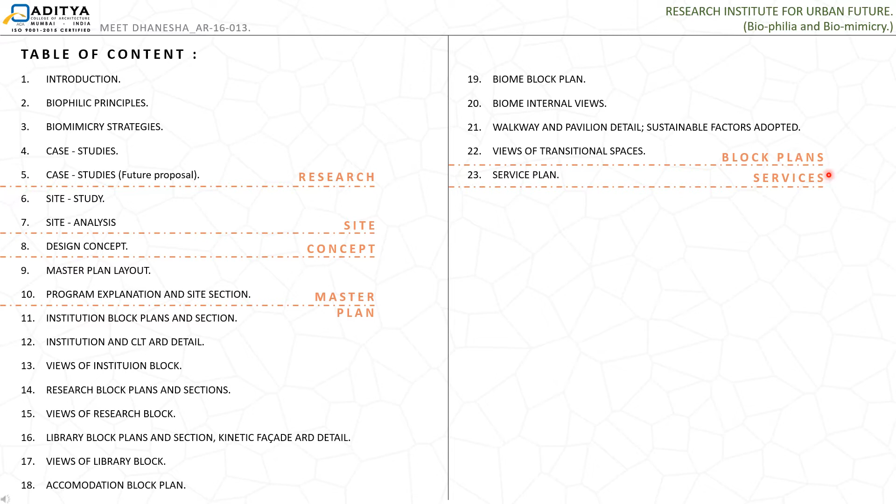To create, conserve, and revive the lost natural ecosystem, biophilia and biomimicry could be one of the approaches for future sustainable cities. There are many effects of urbanization, but ultimately it narrows down to climate change and human health.

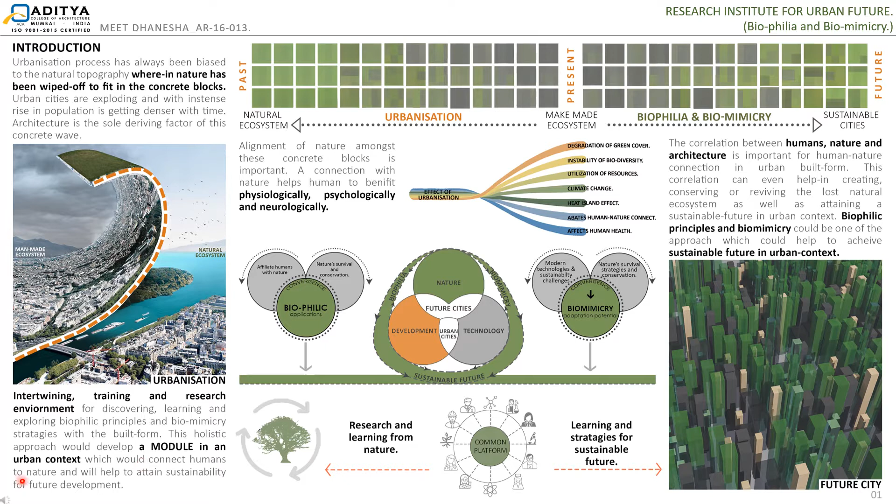This would even act as a module of nature and architecture in urban context. Biophilic principles: biophilia refers to human affinity to affiliate with natural systems and processes.

There are in total 14 design principles which are supported with diagrams and one example for each. These 14 design principles are then categorized into three groups: nature in space, where humans connect to elements of nature directly or indirectly, and natural analogues, materiality and strategies adopted by nature.

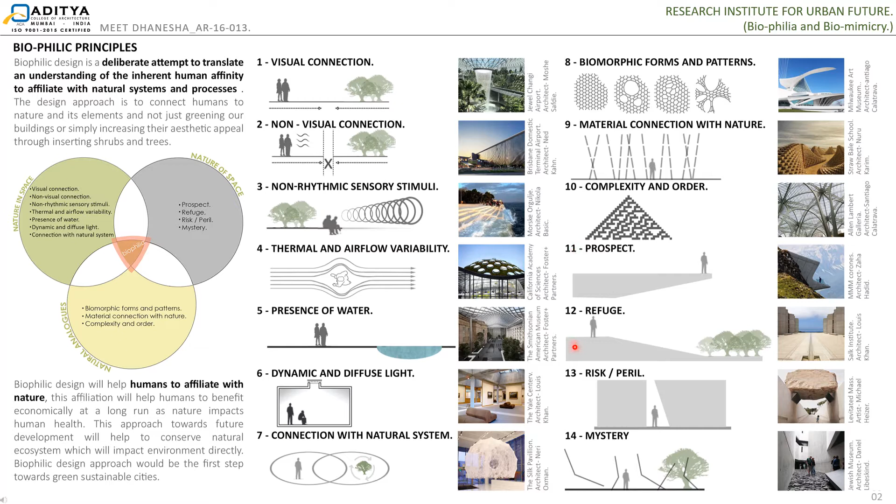Nature of space is about the spatial characteristics. Biomimicry is understanding of process and ecosystem found in nature for its practical applications. It is majorly divided into two levels, ecosystem and organism.

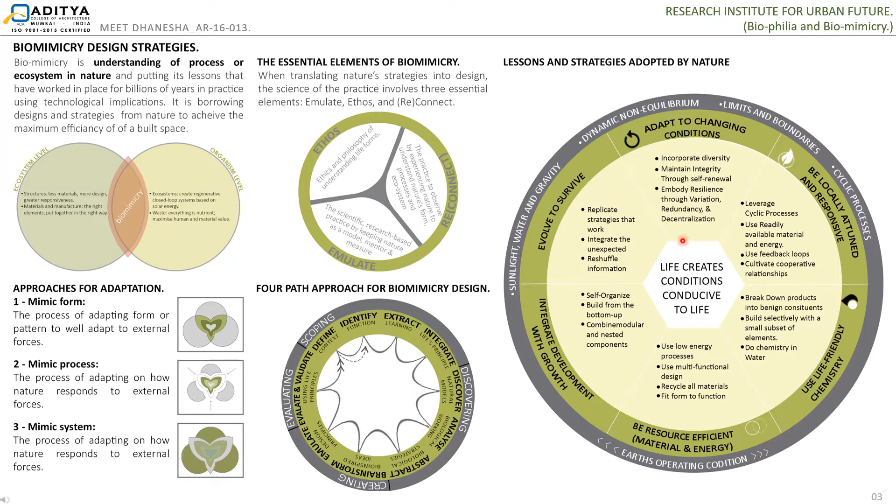Adaptation from nature can happen in three ways: form, process and system. It has three essential elements: ethos, understanding life form; emulate, considering nature as model; and reconnect. The four-path approach needs to be adopted to attain biomimicry. This diagram shows lessons and strategies adapted by nature.

Case studies which had referred to nature as a module and considered nature into the space for human health and well-being were chosen to understand the applications of biomimicry and biophilia with architecture. The contextual impact of the same was also analyzed. The table below shows the biophilic principles and biomimicry adaptations for individual structures.

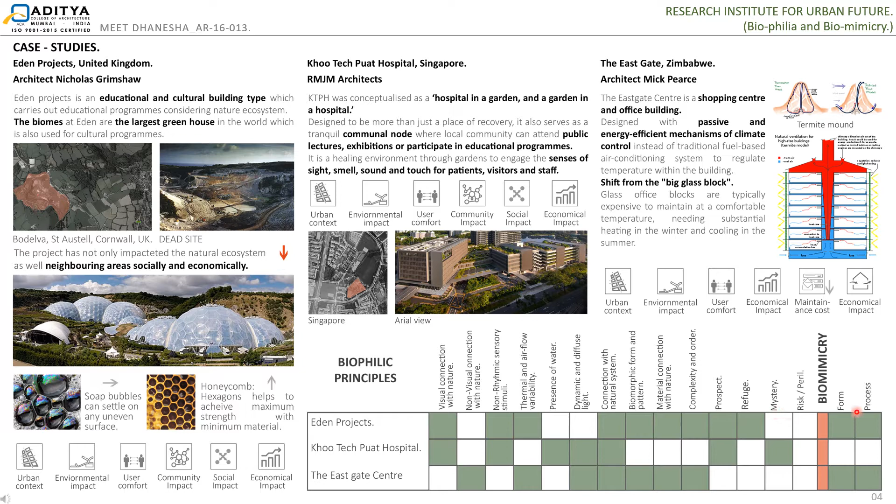Future proposals where initiatives are taken by architects in various countries towards climate change and providing educational research programs, along with public involvement for sustainable future developments. Climate Solution Center in New York, and Oman Botanic Garden in Muscat are the educational research programs for future sustainable development.

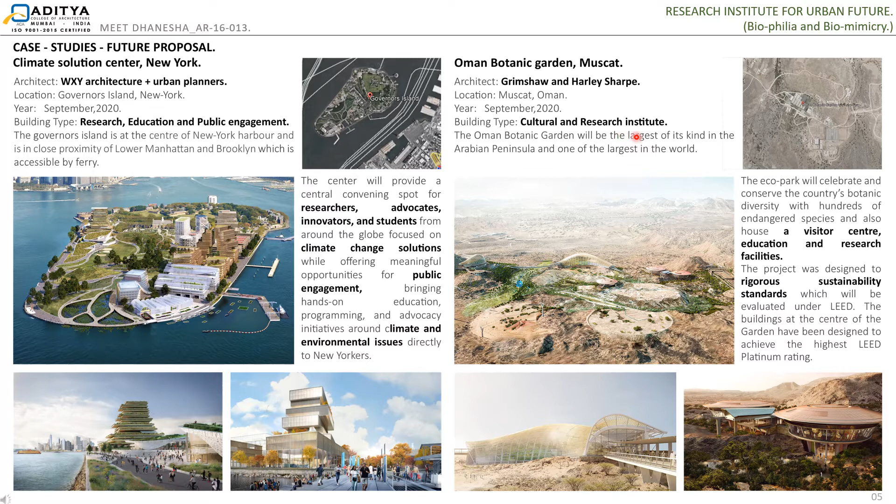The site was taken in Pune, which is the educational hub and in close proximity to the IT hub Mumbai. Pune has multiple research institutes including the Indian Institute of Science Education and Research, which is 1.3 kilometers away from the chosen site. Pune Municipal Corporation has also approved the Smart City Mission proposal.

The site is next to the Biodiversity Park of the Smart City Mission. The map shows physical mapping of the site and surrounding areas. The diagram shows physical character of Pashan district.

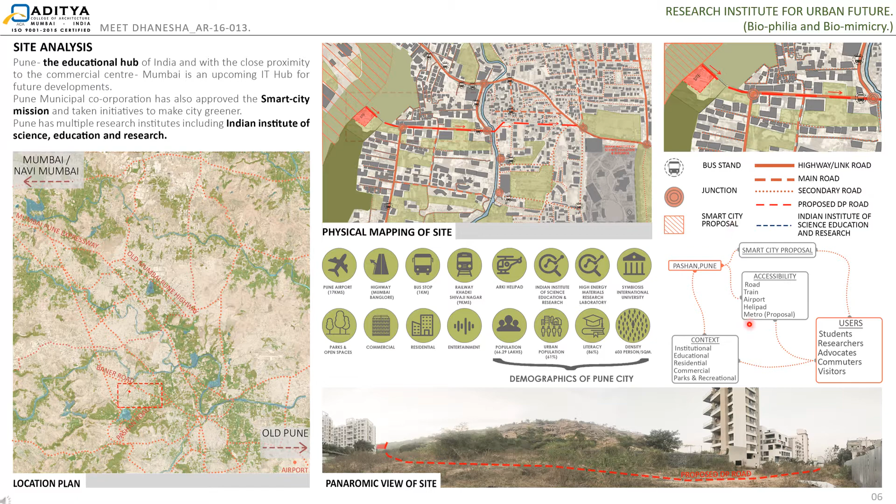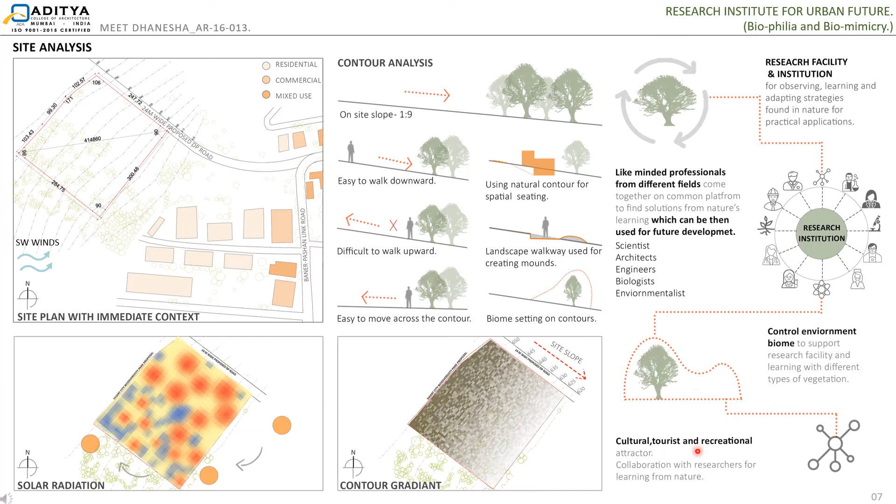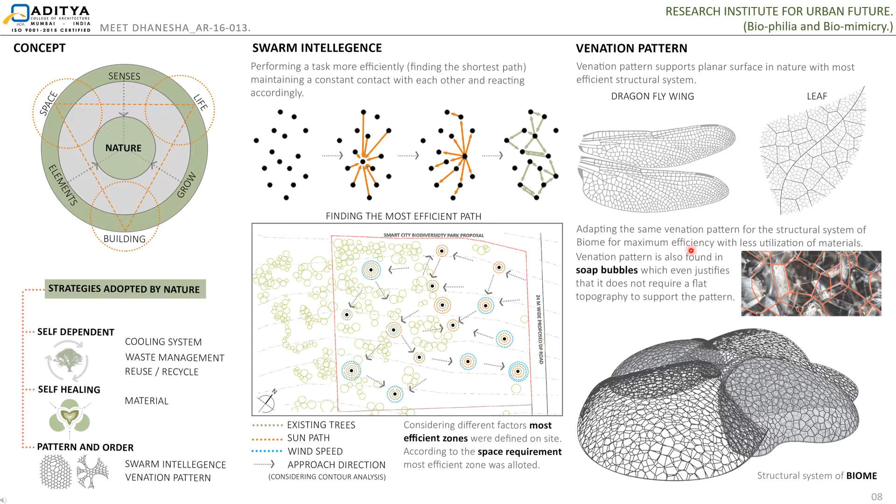Venation pattern, which is found in almost all the structural patterns of planar surface to withstand load, was adapted for the structural system of the biome.

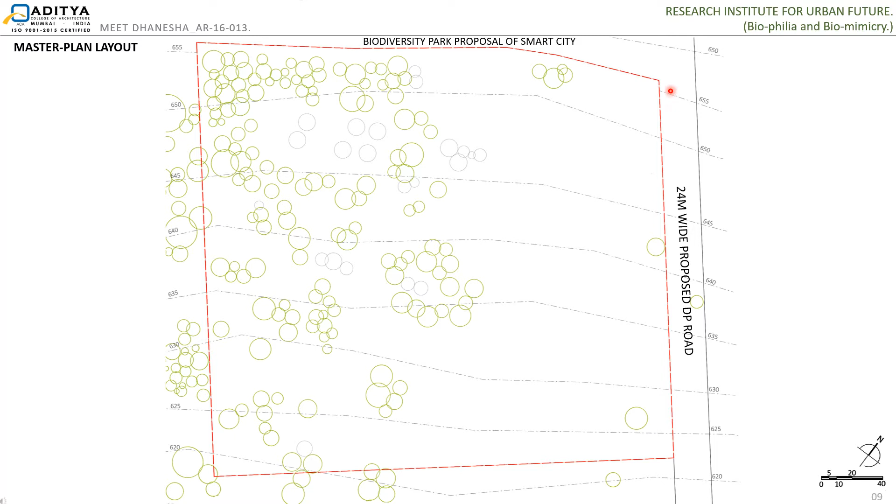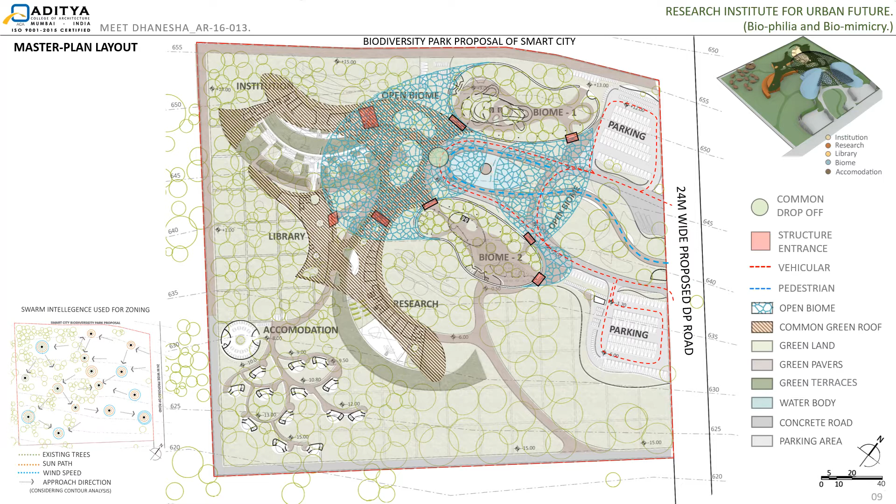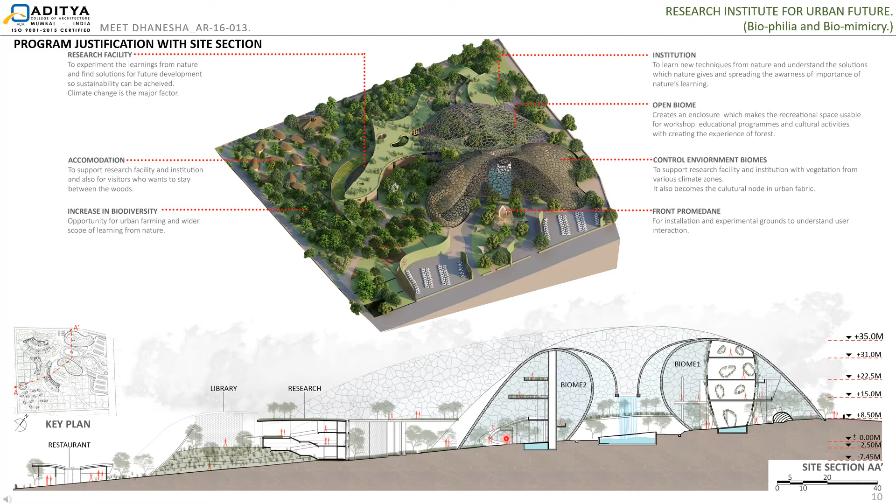Accommodation to support research facility and institution, also for visitors who want to stay between the woods. Front promenade acts as an installation space for the experiments carried out after learning from nature. Site section showing the overall massing of the site and the central waterfall in the open biome.

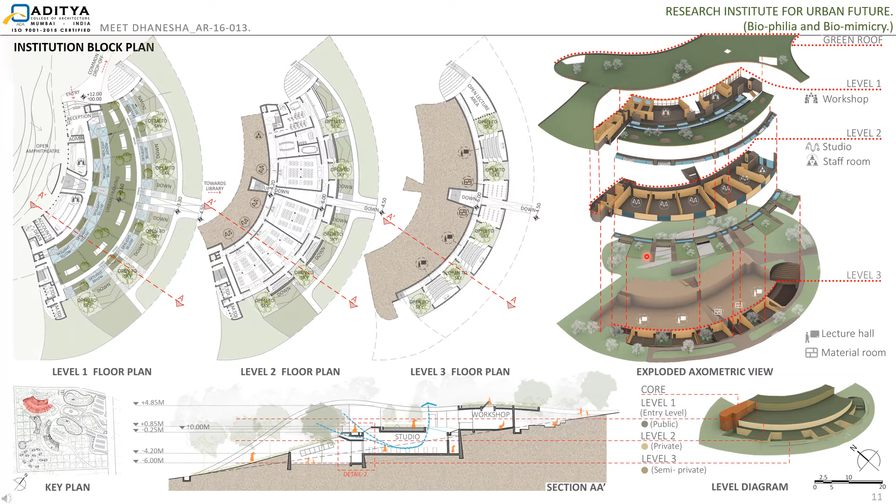Institution section and CLT details. This section shows the utilization of natural topography to fit in the space.

CLT, cross-laminated timber, is the primary material used along with steel for connections and RCC for retaining the soil. CLT has a lower carbon footprint compared to steel and concrete, and gives a wooden finish inside the space.

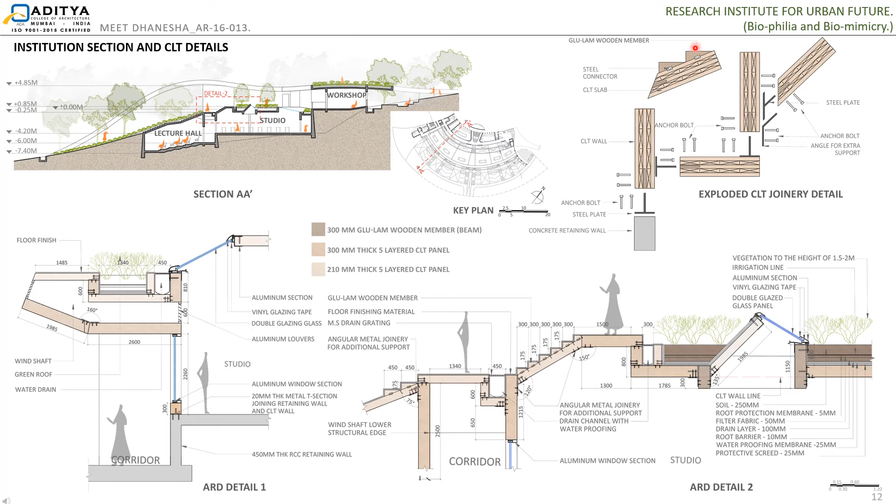The detail section shows joinery details, structural member sizes, and different layers of the green roof. This diagram shows how CLT members are joined using steel joinery and by overlapping the members. This is a detailed section of the wind channels created for ventilation with louvers.

Views of the institution block: exterior view of the upper level showing the green roof of individual spaces with skylight and louvers, open amphitheaters for public programs, and internal view of the studios with skylight and louvers.

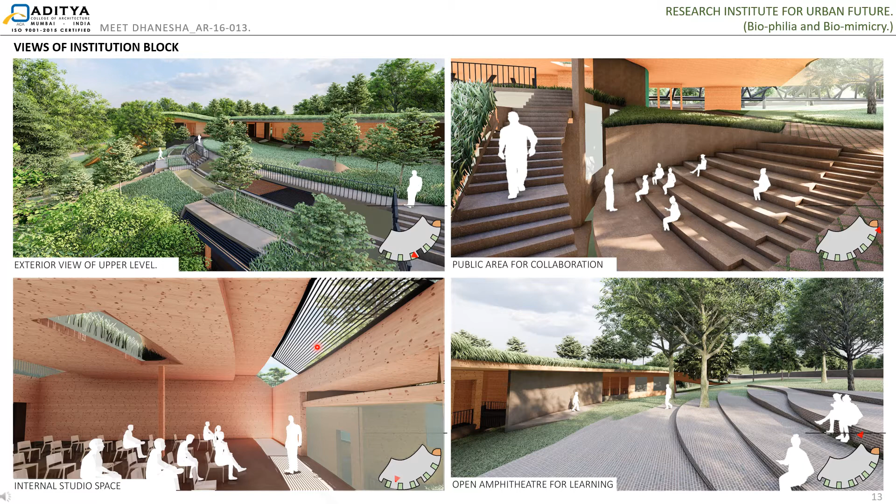Research block plan: entrance via common drop-off. A downward ramp leads to the public area, with linear movement to the research area where organizational bodies exist in the front part. Multiple levels are created considering the site contours and the public-private circulation.

The green roof on the left connects various levels of the research block and then connects to the library. A central atrium is created, used for exploration and fabrication, and is also provided with stepped co-working space.

Departmental offices with working space are also provided on the left. Laboratories are on levels 1 and 2, and fabrication and execution on level 3.

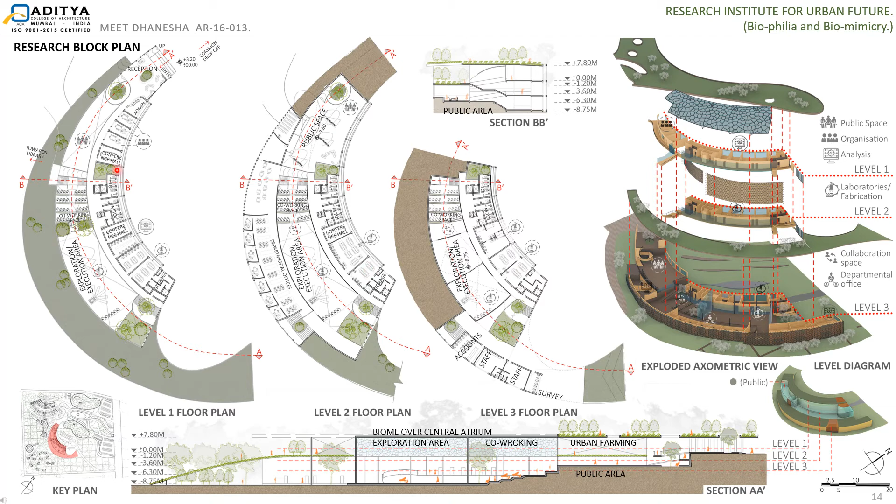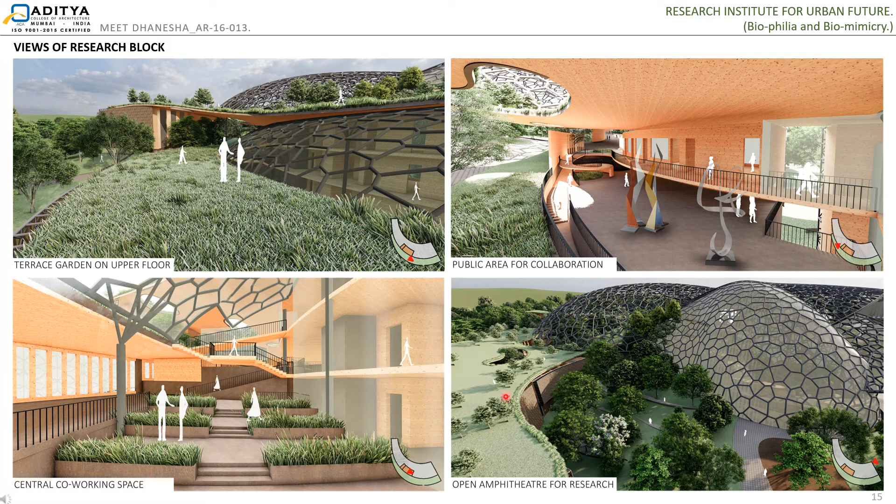Views of the research block: terrace garden with biome covering the atrium, public area at the lower level, central co-working space, and an overview of the research block showing the kinetic facade with biome structure.

Library block plans and kinetic facade details. The library can be directly accessed from the institution and research blocks, with a common reception acting as a converging point. The lower part is the library area along with the discussion space.

A double-height reading space is provided between the woods. The upper level has a computer lab, which is also directly connected to research and the institute.

The kinetic facade automatically operates according to solar radiation. Hexagonal frames hold this kinetic facade, and a hollow tube with a rotational steel rod is attached to the frame.

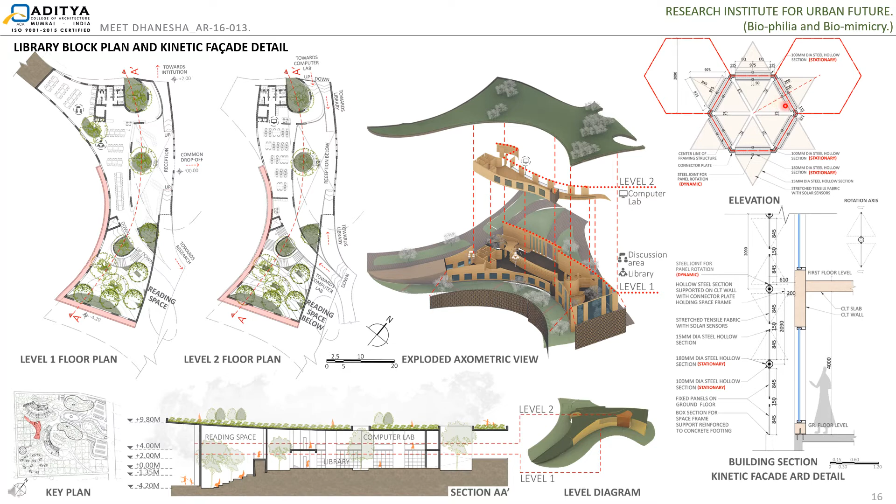The stretched tensile fabric attached to the frame, supported by the rotational steel rod, is provided with solar sensors which rotate 180 degrees according to light requirement.

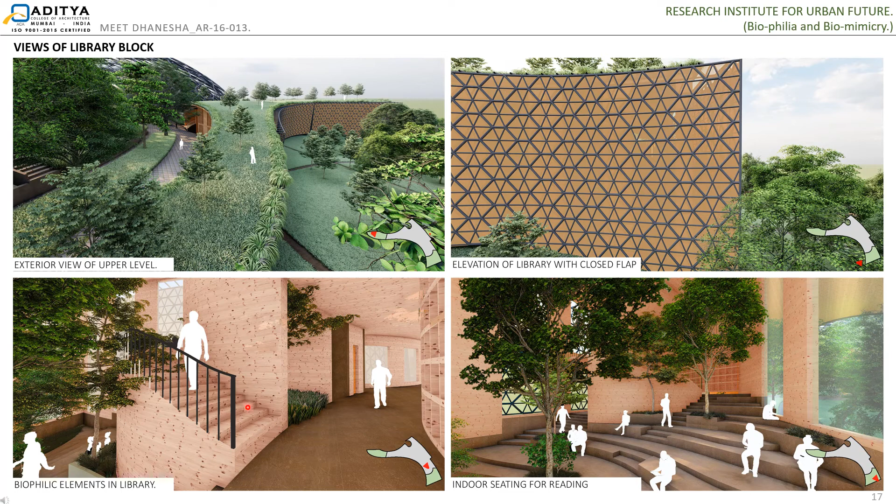Views of the library block: exterior view with green roof merging with the landscape, elevation of the kinetic facade, and biophilic elements added indoors, including the indoor reading space between the woods.

Accommodation blocks are provided for outside researchers and visitors who want to live between the woods. CLT walls and columns support glulam rafters which hold the thatched roof. View showing the accommodation block between the woods.

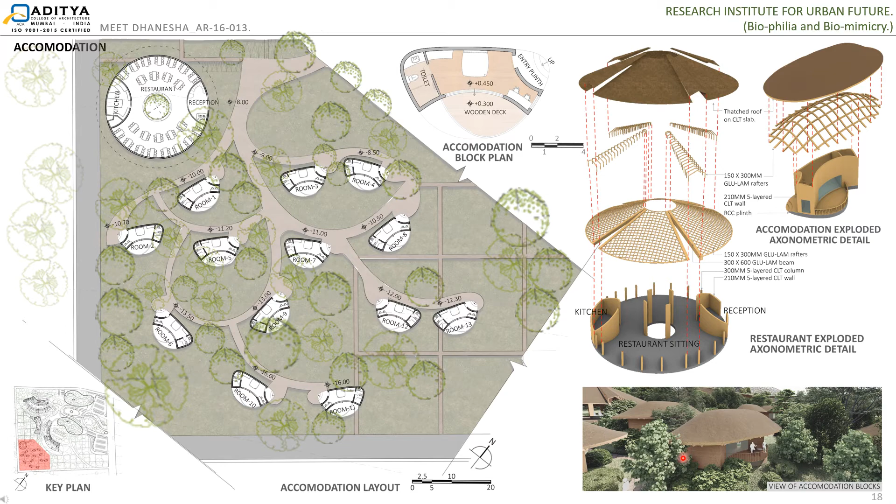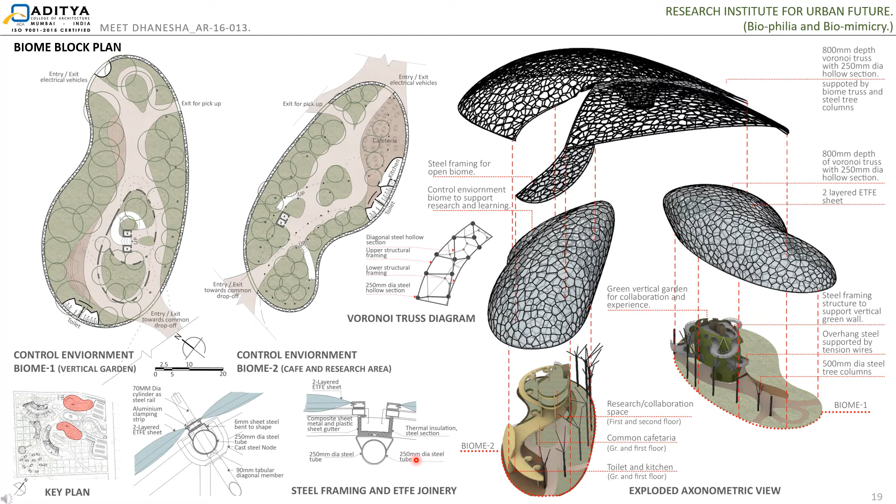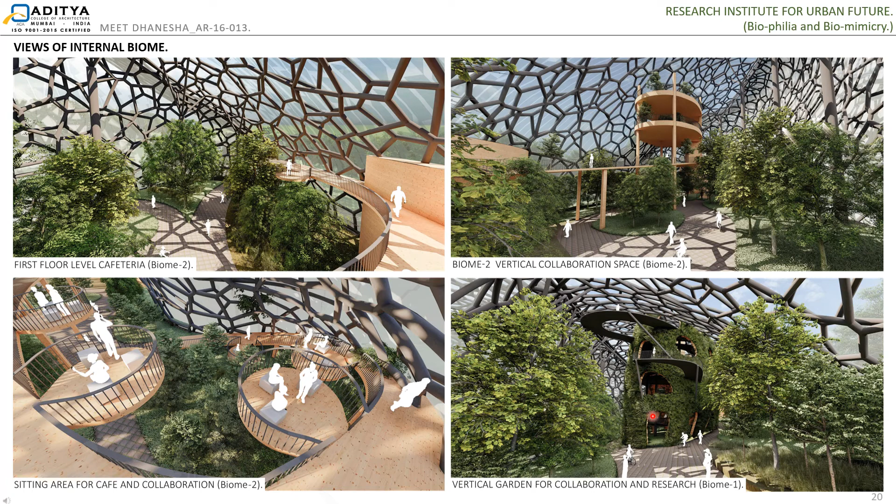Views of the internal biome: cafeteria and vertical collaboration space in Biome 2, overhang seating area for cafeteria and collaboration, and a vertical garden view used for research, learning, and public awareness programs.

Walkway and pavilion details. The parking walkway is provided with solar panels on the south green wall on the opposite side, and windmills punctured in the southwest, which is provided with working details.

The pavilion is one example of exploration added to the public space, which is biomimicked to understand user interface and sustainability. Details show various levels of the pavilion.

Sustainable factors adopted for design. Accommodation: CLT walls and thatched roof used, which has a low carbon footprint.

Institution: CLT as a material, earth-berm structure, and passive cooling ventilation. Research: CLT with indoor gardens which creates a positive environment indoors.

Walkway: solar panels and windmills to generate renewable energy. An internal waterfall creates a microclimate and utilizes only rainwater.

Biomimicry helps utilize less structural material. ETFE sheets are used instead of glass.

A mist HVAC system is created with openable vents to control the indoor environment. Rainwater is utilized for the farmland.